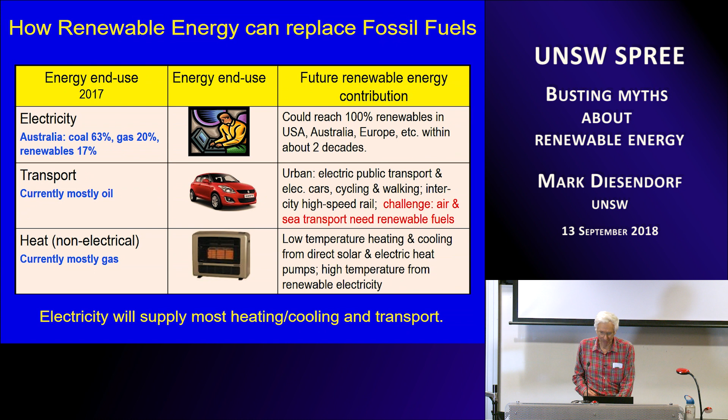I also have concerns, while we're talking about terminology, about talking about clean energy, because this term was created by the nuclear industry so they could include nuclear power alongside renewable energy. It is anything but clean.

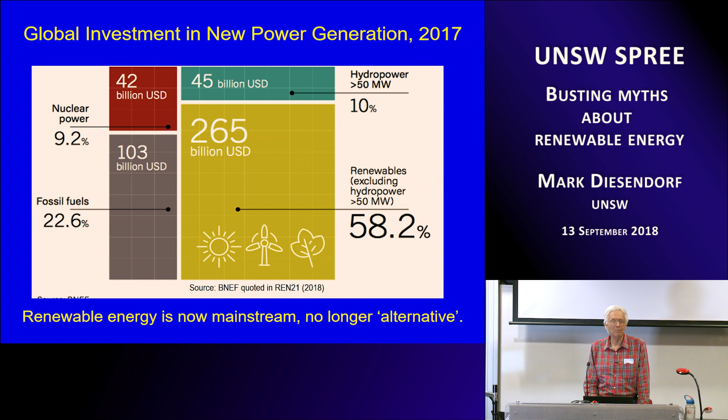In Australia, renewables last year provided 17% of our electricity, and hydro and wind are now making equal contributions to electricity, each contributing about one third.

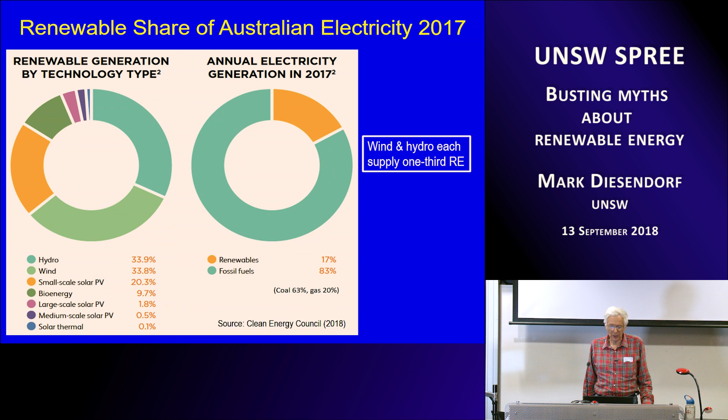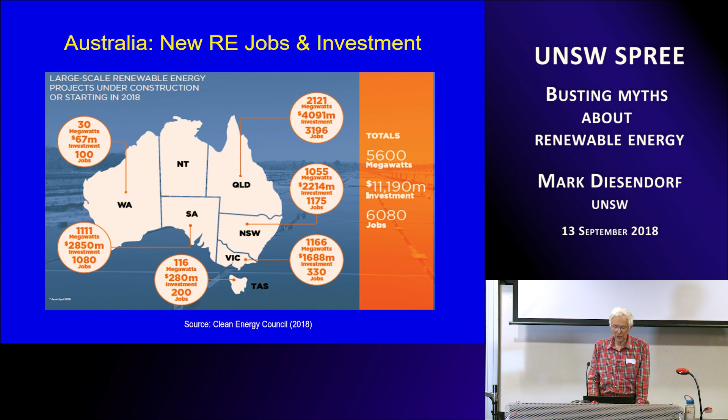I won't go through this slide, but the Clean Energy Council produced it to show the number of new jobs and investment in Australia. They're very impressive, and this slide is already out of date, although it was only published a few months ago.

Okay, now Australia is blessed with a huge diversity of renewable energy sources. Many different sites are possible. In the pictures there, two of those technologies are not yet commercially available: hot rock geothermal and wave power. They're still really at the demonstration stage.

But apart from that, we've got CST, concentrated solar thermal with thermal storage, or we have the potential for it hugely. Solar PV, of course, wind, existing hydro, bioenergy, and in the middle, a form of hydro that is relatively new still to Australia.

Well, Tumut 3 actually has a pumped hydro system, but pumped hydro of the conventional kind is fairly limited geographically. As Andrew Blakers pointed out here a few weeks ago, what is new is off-river pumped hydro, and it can be off-river if the lower reservoir is the ocean, or it can be a mine shaft, and so on. According to research by Blakers and his group, there is a huge potential for off-river pumped hydro.

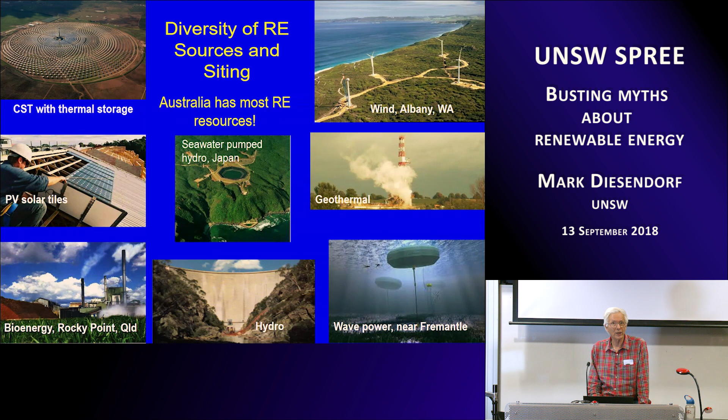It can complement batteries because batteries are very expensive if you want to store lots of energy. They're fantastic for rapid response, millisecond response, but if you want to store lots of energy for periods of days and weeks, then pumped hydro is the cheapest way to go.

Okay, now there are 4 ways, as I've framed it, for achieving 100% renewable electricity. And the first way on this slide is well known.

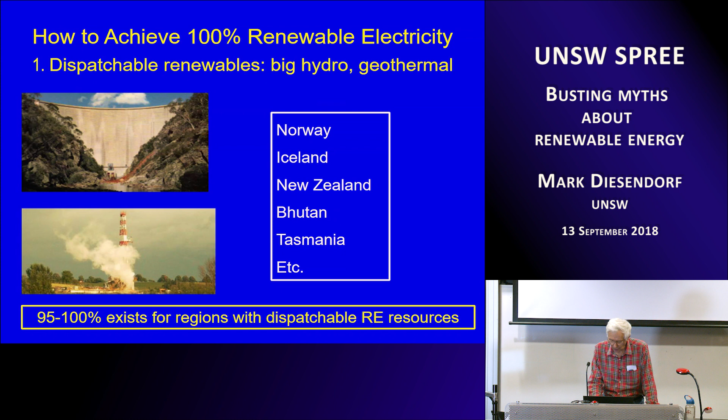It has been achieved or almost achieved many years ago, for regions that have lots of hydro, lots of potential for big dams, or in some cases geothermal. We're talking about Norway, Iceland, New Zealand, Bhutan, Tasmania, and quite a few other places. So that is straightforward, not too hard to go to 100% renewable electricity there, and the only concern is the occasional incidence of droughts, which can be a problem. Okay, so this is easy.

The second way is that you can go to 100% renewables if your country or state has strong connections with its neighbours, strong transmission links. Denmark is currently on 44% wind, and it's strongly connected to Norway, where there's huge hydro storage.

Scotland is 68% renewable energy, mostly wind with a little bit of hydro, strongly connected to England. The ACT here in Australia is well on track to 100% renewable electricity by 2020. It's strongly connected to New South Wales, but it might also belong in the next category we'll come to.

And 2 North German states, Schleswig-Holstein and Mecklenburg-Vorpommern, are on 100% renewable electricity net, mostly wind, and the net means that if there isn't enough wind, they buy electricity from their neighbours, and if there's too much, they sell it across. So this form of 100% renewables, variable renewables with strong interconnections, has become pretty well routine recently.

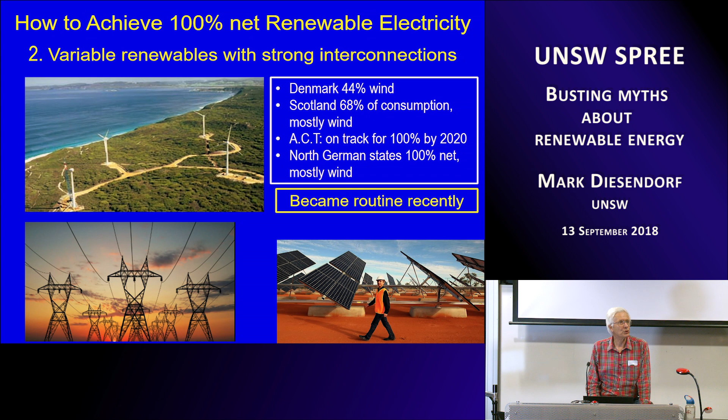That's trivial. Now, a variant of this is if we have a region or a business that might install some of its own renewables on site, but can also purchase renewables in various ways through power purchase agreements and other ways from elsewhere. So the ACT fits in that category as well, because most of its wind farms are in Victoria and South Australia, for example, but they count that electricity.

And this is quite important because we're talking about making effectively a renewable energy technology, batteries in this case, with renewable energy. This is known as renewable energy breeding. So renewable energy can breed more renewable energy.

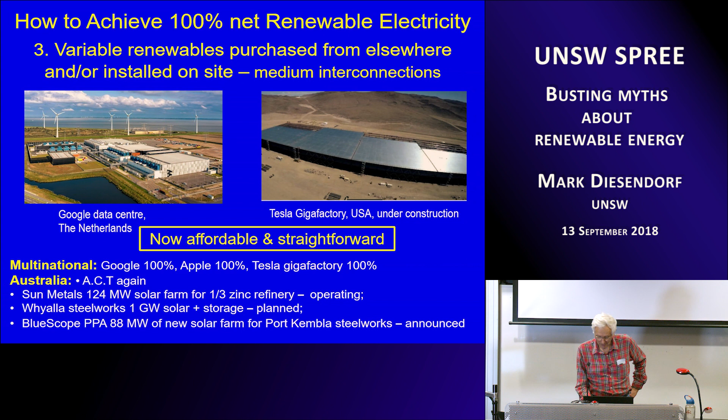Okay, so that's fairly easy too, and that's starting to happen, and it'll happen faster and faster because in many regions now, as you know, solar and in some cases wind is a lot cheaper than either buying from the grid or having diesel in a remote area.

Okay, the fourth case is the more challenging one, where you've got variable renewables, mostly wind and solar, for example, local generation, and weak interconnections with your neighbours, or none at all. So in this category, we've got the national electricity market. It'll be some time before it's connected to Asia, for example, maybe never.

We've got SWIS, the Southwest Integrated System in Western Australia. I suppose I can use this little pointer, so that's over there. Oh no, that was a big mistake. Go back.

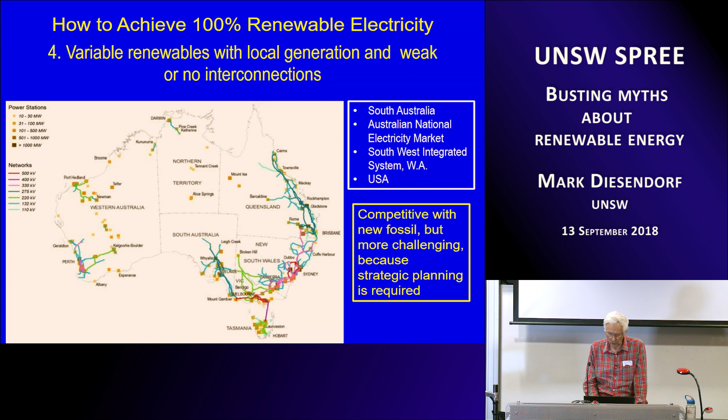We've got the USA, which hasn't got terribly strong connections to its neighbours. And the question then is raised, well, can a system based predominantly on variable renewables operate and reach 100% renewables in a way in which it's reliable and the system is secure and, of course, affordable? So I'll mainly focus on that.

But before doing so, we have several requirements for an electricity system, and we've heard the government talk about reliability and affordability. Another concept that is mentioned less often is security, which I'll mention in a moment, and which is not quite the same as reliability, although it's related.

We're not hearing a lot of mention from the government about ecological sustainability, but I'm going to suggest that everything has to be embedded in a system that is ecologically sustainable. And that means renewable energy and, of course, energy efficiency, which is not the subject of this seminar.

Unfortunately, we have what I would call renewable energy deniers, some of whom are climate science deniers and some of whom accept the climate science but support nuclear energy. And they're using very similar misleading tactics as climate science deniers to now attack renewable energy.

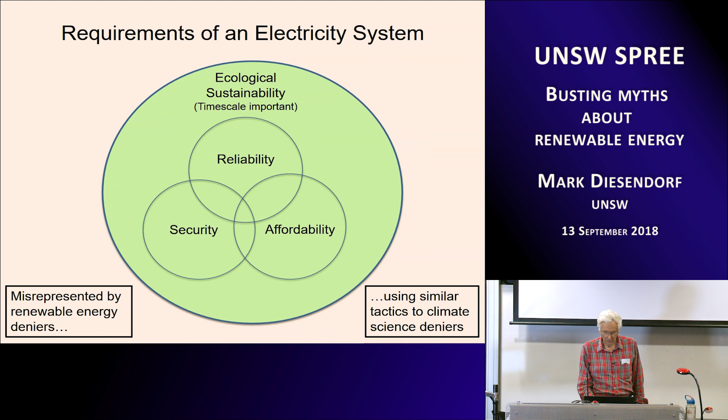I'm going to look at some of the principal myths. I've listed 4 main myths there. There are many more, but these are the ones we probably hear most about.

The first is that we need so-called baseload power stations in a large-scale grid. They can be either coal or nuclear, or if you have cheap gas, as South Australia once did in the distant past, they could be gas boiler systems. Or in Tasmania, you've got so much hydro that hydro is baseload. So baseload simply means they can operate 24/7, except when they break down or have planned maintenance. That's probably the main myth, and we hear it all the time.

Another variant of this myth that has gradually faded away is that baseload power stations must run continuously as backup for variable renewable energy. That myth is pretty hard to sustain because we are now seeing a situation in South Australia where we've got about 50% annual average renewable electricity from variable sources, wind and PV. The only nominal baseload station is Torrens Island, a gas boiler station, and it is not operating as baseload now. It will soon pass on.

Another myth is that variable renewable energy needs vast amounts of expensive electrical storage. We can easily show that, in fact, the amount of storage we need in the system is relatively small, both in power capacity and in energy storage.

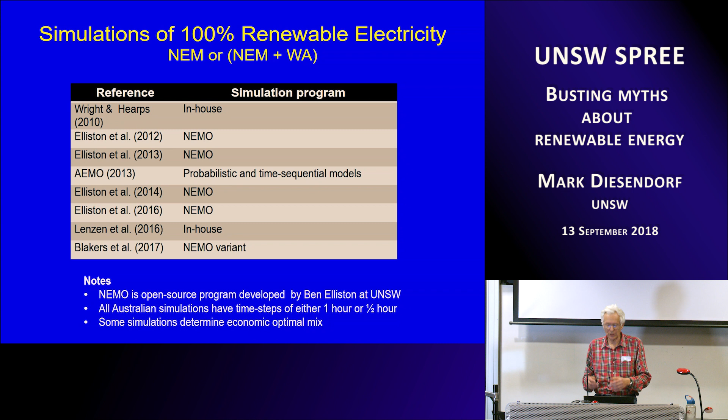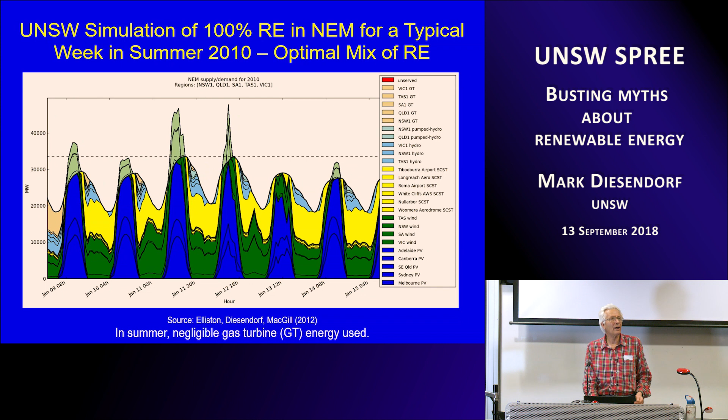So a typical week is easy, although you'll notice on the left-hand side there's a little pink bit in the supply, and that is a gap. Sunshine was poor on that day, wind wasn't great, so we had to fill the gap with something. For the early simulations, we used gas turbines running on renewable fuels, and it turns out they hardly ever have to be used anyway during the year.

But of course, nowadays, we would envisage the gap being filled probably not by gas turbines, or only temporarily, and more reasonably by a mix of batteries and off-river pumped hydro, and actual on-river pumped hydro where it already exists.

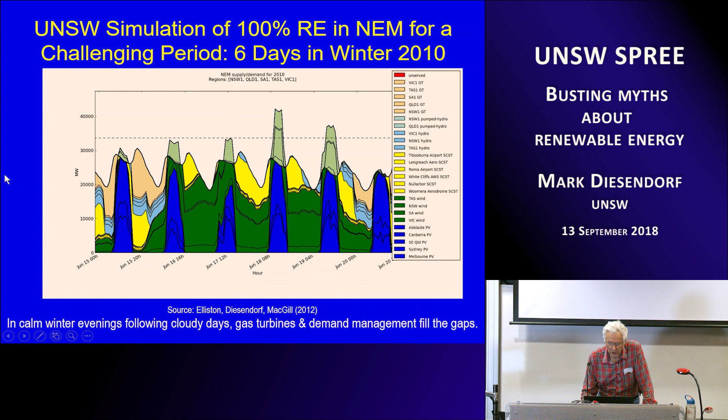And here we had a system which was reliable, so all our simulations have to meet the reliability criterion of the NEM, and 2/3 of the annual energy is coming from variable renewables.

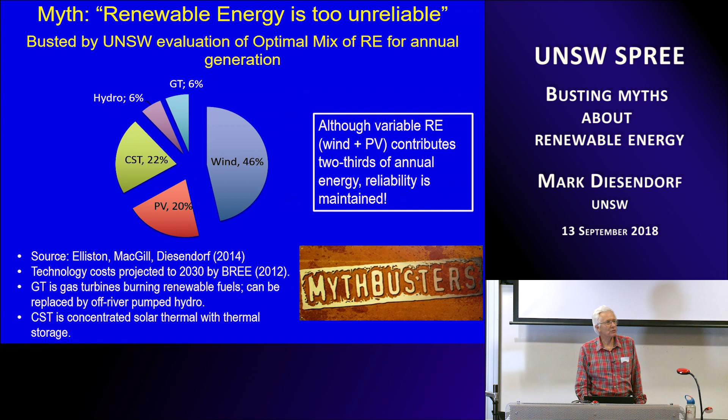So how's that possible? Well, these variable renewables are balanced with what we call dispatchable renewables. They can supply power on demand because they have some storage associated with it: CST, existing hydro, which was 6% in that year, and biofuel gas turbines, which was 6%. So that got us very excited, as you can imagine. We didn't have a huge amount of storage in the system, and we're still getting a reliable system.

So just to discuss the reliability a bit more. The key source of the reliability is balancing lots of variable renewable energy with a smaller proportion of flexible, dispatchable renewable energy technologies, or other forms of storage if you want to put in batteries or compressed air.

That's the key, but the other things that increase and strengthen the reliability is having a diversity of renewable energy technologies. So if your variable renewables were all wind, as is pretty well the case in Northern Europe, it's more difficult. Or if it's all solar, if you're in the tropical area of the world where there isn't much wind. So diversity of technology is important.

Geographic diversity of wind and solar is very important. You spread out your wind farms and solar farms, and immediately the fluctuations become much smaller. And we did some simulations to show that.

If you've got geographic diversity of wind and solar farms, you may need one or two key transmission links to be built. Transmission is a bit slow and it is quite expensive, but often building a transmission link has other values, particularly in the NEM, which is this long 5,000 kilometre long line, and putting in the odd cross link, like joining South Australia to New South Wales, can be argued on many grounds.

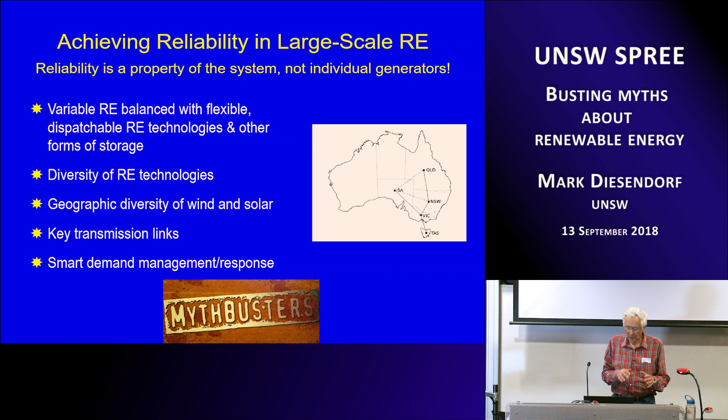And the other thing I haven't mentioned, of course, that is getting increasing attention is smart demand response—so shrinking the peaks by demand response through contracts and so on.

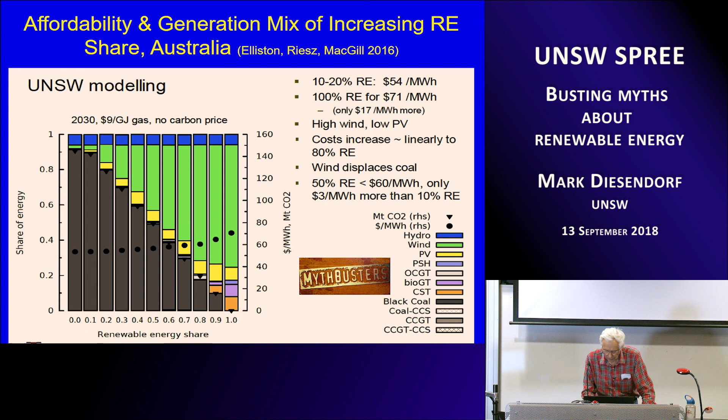Let's talk about some more myths now. We don't need base load, we don't need loads of storage in the system. What about the affordability? We have some lovely myths trotted out almost every time a minister is interviewed.

One of the myths, or misleading statements let me put it this way, is that South Australia has the highest electricity prices in Australia. The statement is actually true most of the time, although there were times when Queensland overtook it, and Queensland has very little renewable energy.

It's true, but it's grossly misleading because South Australia has always had the highest electricity prices in Australia long before it had any renewable energy, and that's because it was largely dependent, and still is to a large degree, on gas. Gas is expensive, and in recent years it's become very expensive, tripling in price. It used to be $3 a gigajoule, and now it's 9 or more, because exports have pulled up that price.

The same attack has been made on Denmark, because Denmark has been so successful with renewable electricity, and the standard statement again is Denmark has one of the highest electricity prices in Europe. It's a true statement, but what the stater does not inform you is that Denmark's high electricity prices are the result of a very high tax on electricity.

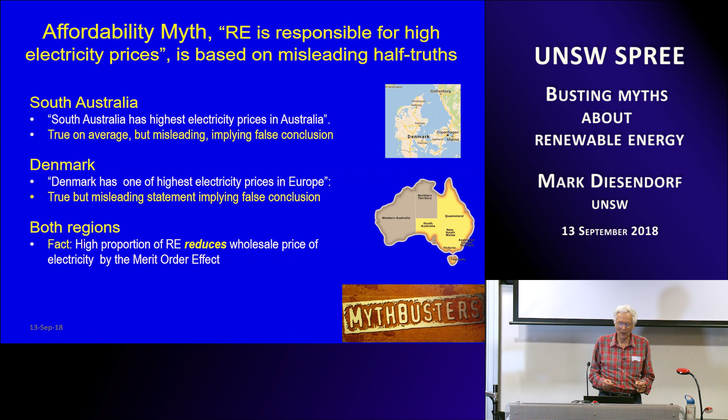So it goes. The other thing that has to be said about affordability is that in both regions, the presence of a large contribution from variable renewables, or renewables generally, actually reduces the wholesale price of electricity below what it would be otherwise. And that's explained in the next slide.

In Germany, the next cheapest to operate after the base load is nuclear, then coal, then gas. Assuming you need some gas as well to meet demand for the next 5 minutes, the price paid to all generators is the highest price, which is the price gas gets. The purpose of that is to help pay off the capital costs of their investment.

Now what happens today is you've got a lot of these intermittent renewables with almost zero operating costs. They have no fuel cost if they're wind and PV, just a small operation and maintenance cost, so they can effectively bid zero into the market. Because they displace gas and most of coal, the final price is reduced since there's still a bit of coal operating. That's the wholesale price.

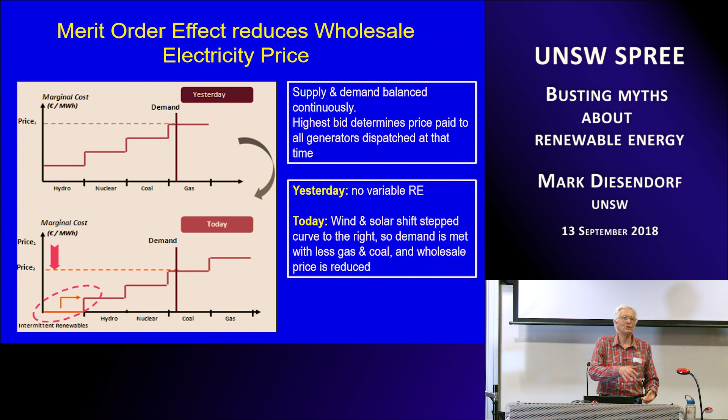And that, in the long run, is going to have a problem, because when you get close to 100% renewables, your wholesale price will drop to almost zero. You might think that's a good thing, but then how do you pay for the capital costs of the technologies? Anyway, that's something to think about.

Now another myth, not so common, states that if we transition to renewable energy, we're going to create a lot of greenhouse gas emissions during the transition, so it isn't really worth the trouble. The greenhouse gas emissions from mining materials and constructing renewable energy technologies are going to make the whole transition idea not worthwhile.

You'd think that's a bit of a worry, but there is at least a partial offset for those emissions, because as time goes on we increasingly use more renewable energy to make the renewable energy systems and to mine the materials - as with the mining example I gave, where the zinc mining company has actually built its own wind farm.

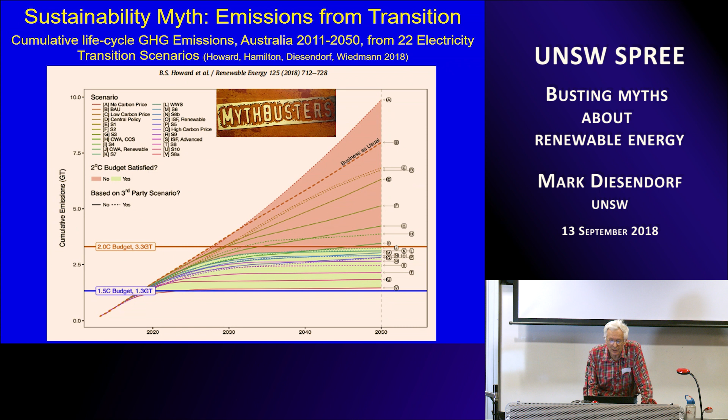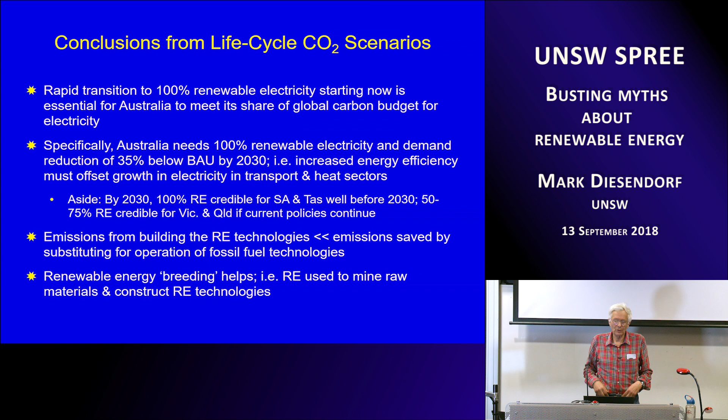So the conclusions for that study, which was only published a few months ago, is that we absolutely need a rapid transition if we in Australia are to make our share of the global carbon budget. All this talk about a 26% target, which has been agreed to, is completely trivial. We need to go to 100% by 2030 if we are to be serious and do our share.

The good news is that the emissions from building the renewable energy technologies are much, much less than the emissions saved by substituting renewables for fossil fuels for that generation. So that's the good news.

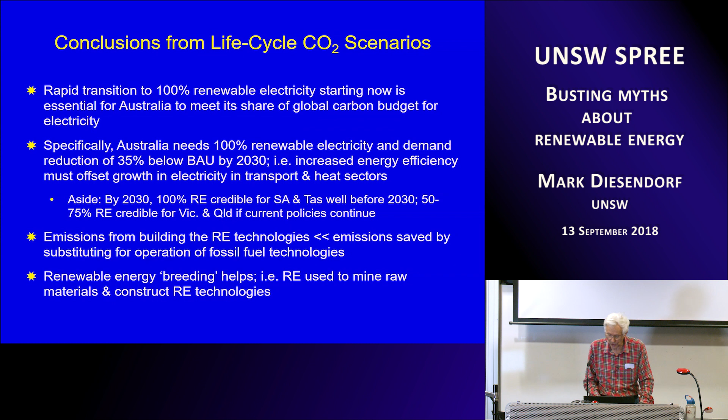And then further good news is that renewable energy breeding helps. It helps a lot, particularly in the later years, getting towards 2050, or if we have a faster transition, 2030. All right, I think I'm nearly done.

Very quickly, all right. Vaclav Smil is a very eminent historian of energy transitions. And he has studied all the earlier transitions, going from wood to coal to oil to uranium and so on. And based on his studies, he believes that energy transitions will take several generations, because in the past they have.

So I had a look at his latest book, and basically, because he's claiming that transition to renewable energy, which he does not oppose, has to take several generations. But he has a number of assumptions underlying that, and he's actually exposed the assumptions.

So the first of these is that most of the renewable energy targets that he's seen in the literature apply only to electricity generation, which is true, but I would argue doesn't matter, because a renewable energy future will be mostly a renewable electricity future.

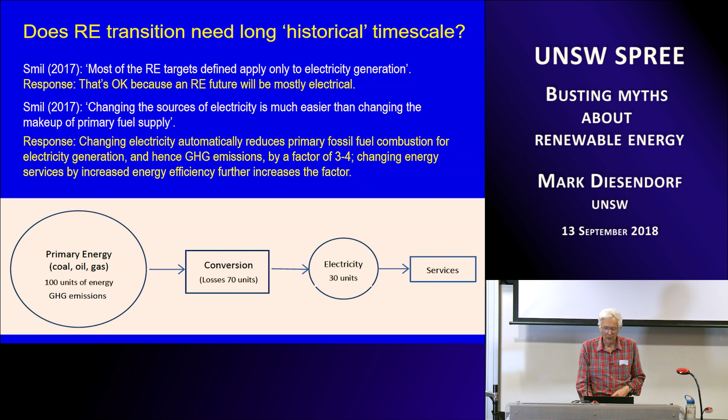So those objections of Smil don't really hold. I'll just go through one more, and that is that he says that wind and solar must be scaled up by increasing the size of generating units, but size limits are being reached. And it's true for wind power, we are getting close to size limits, although they've gone surprisingly far for offshore wind. But it is not true that scaling up the size of individual units is what's been pulling the price down of wind and solar.

The continuing cost reductions are actually coming from more and more mass production on a larger and larger scale by expanding the market, and in the course of doing that, improving the supply chains. There's also, of course, valuable contribution from research and development, which this university is very prominent in. But the main cost reductions are coming from increasing mass production, not from making bigger wind turbines or bigger solar modules.

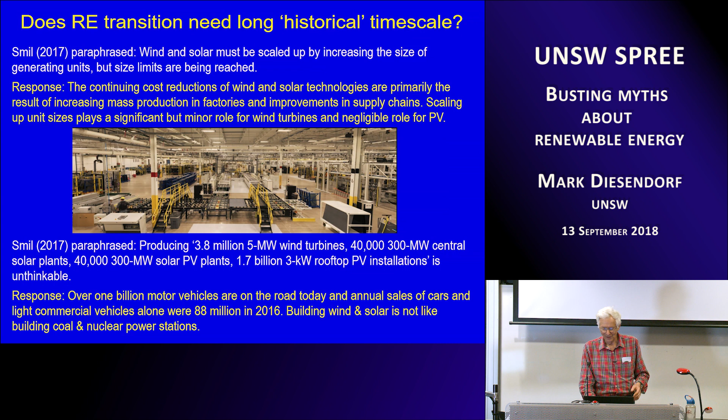So at least I can say that the arguments that Smil gives are based on false assumptions. Now, I would say that the main barrier is, of course, political barriers and the power of the fossil fuel industries in particular. I'm going to skip over security because we're just about out of time.

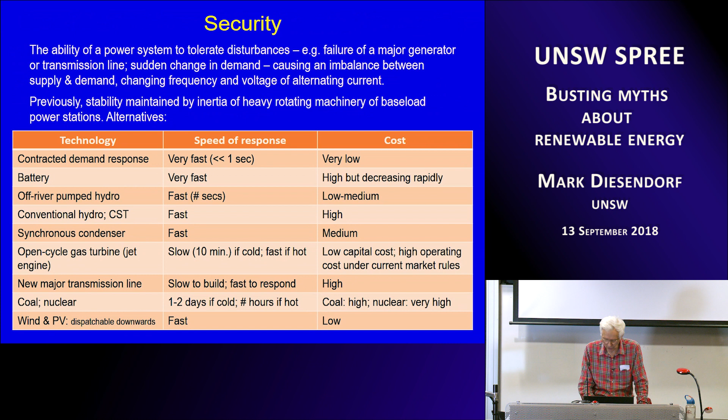But that didn't affect Tony because it wasn't really about that, apparently. There's a fantastic myth-busting video, a short one, that you must look up if you haven't seen. Look up 'Honest Government Ad' and you will be entertained.

So to conclude, what do we need, in my view, from a future federal government? We don't need an NEG - that would be a backward step. We first need the government to get out of the way and stop undermining investor confidence in renewables.

Because the economics are fantastic, we do need, to help investor confidence, renewable energy targets. Maybe 60% by 2030 would be nice - it's quite feasible. But as I said, the science suggests we need 100% by 2030. Even starting on a 60% target would get us going.

The LNP has a target of 25%, or is it 26%? The ALP has a target of 50% by 2030. The Greens have a target of 100%, but they don't specify the year.